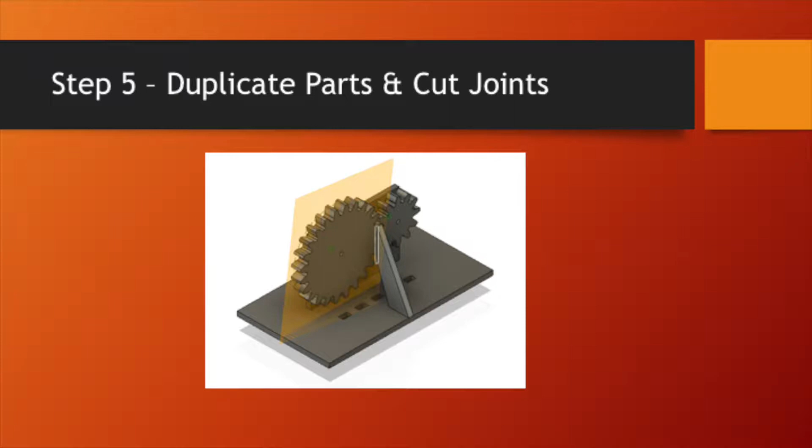We now need to make sure that we have two uprights and matching braces on the other side. And then once we've got all our parts in place, we need to cut the joint holes, because if I just cut this laser part out now, by turning the braces off, you'll see that the braces don't actually fit in. So there needs to be little holes cut in here for the braces.

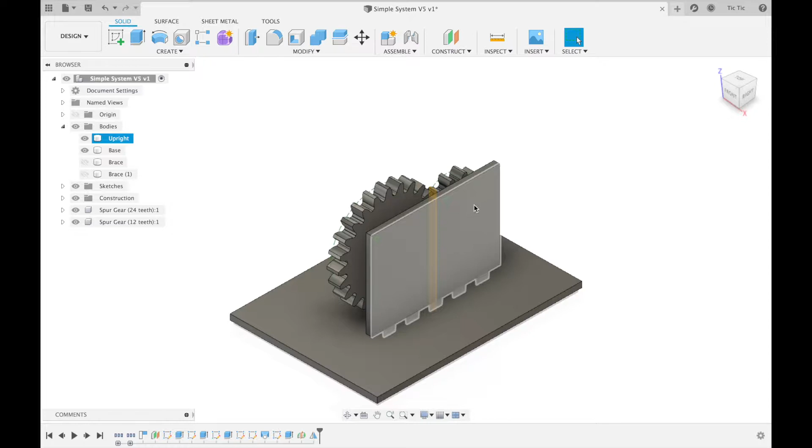And also if you turn the upright off, you'll notice that there's only one hole for the upright finger joints to go in. So we need to cut those finger joints out. But first of all, let's get all our pieces in position. We saw how to do this when I did my extra brace in the middle. But if we go into our construction tool here, we've still got that mid-plane there.

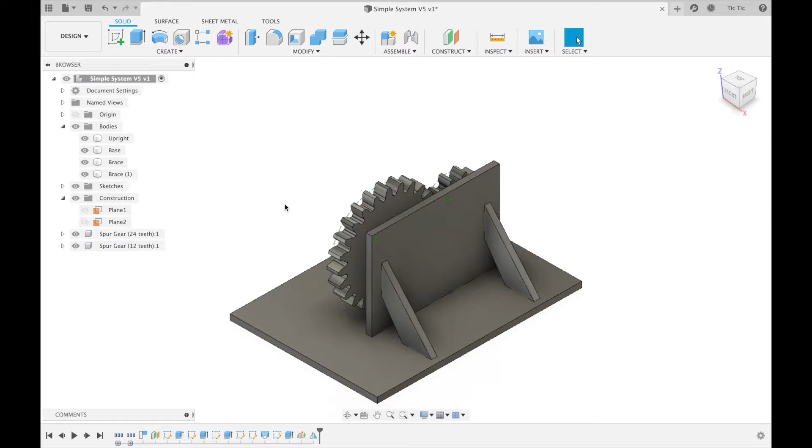Let's turn that off. Okay, so now I'm going to create my construction here, and I'm going to create another mid-plane on either side of my main big gear. So I now have a mid-plane in my gear.

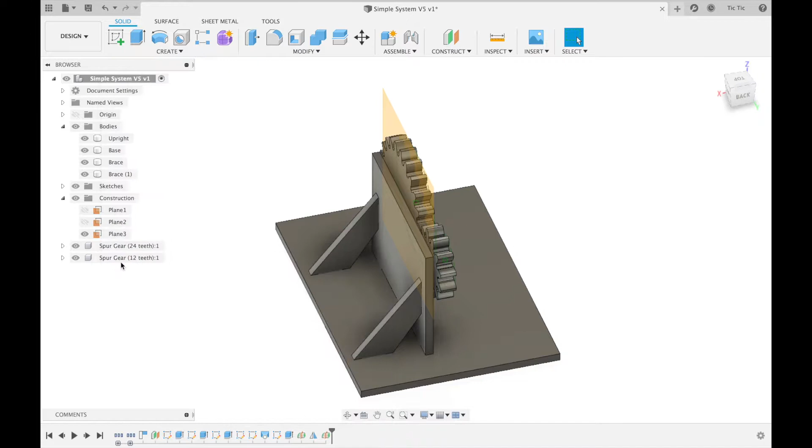I'm now going to use the Create Mirror tool to mirror 1, 2, 3 in my case bodies around my mirror plane. Now that I have those bodies in place, I can now basically see what I've got to do to cut out. Let's get rid of that construction plane by turning it off. And you can see now that I've got lots of parts in here, all nicely labeled.

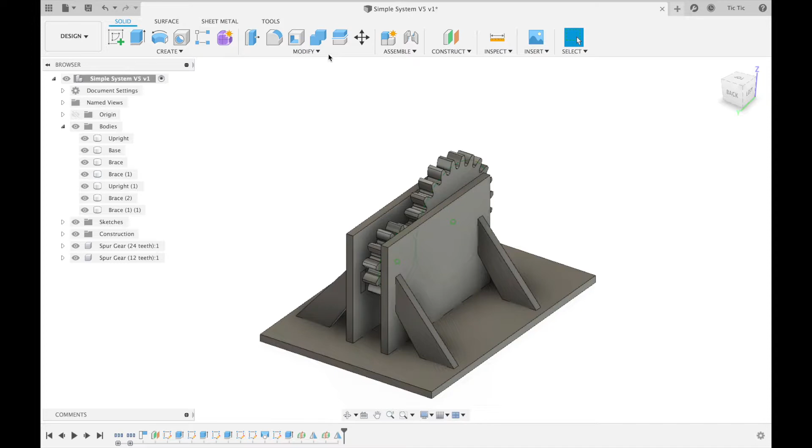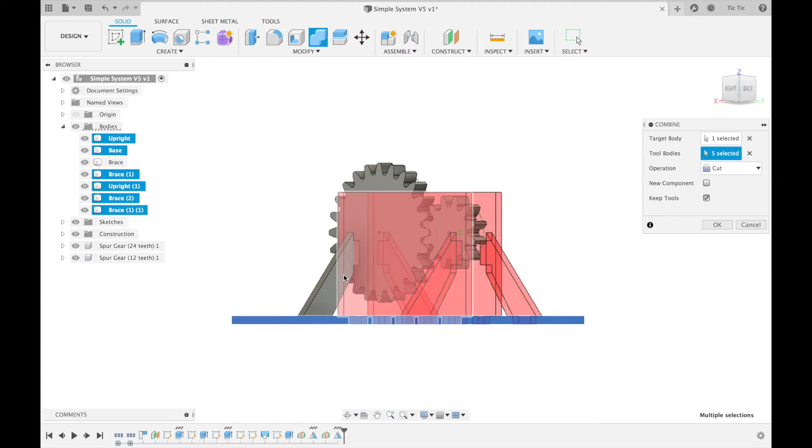I'm going to use the Combine tool, which is up here. And I'm going to use the cut method, but I'm going to keep the tools. The first target body I'm going to select is the base. And if I then select all my tool bodies, which is going to be everything that intersects with it, and going around the other side, that one there, and if I press on OK,

it's going to basically look like I've done nothing. But if I turn everything off other than the base, you can see now that I've got all my holes cut in there. Might be a good idea if I turn those two off as well. So you can see that I've got all my holes cut in there in order to make the joints nice and effective. We also need to cut holes in my uprights.

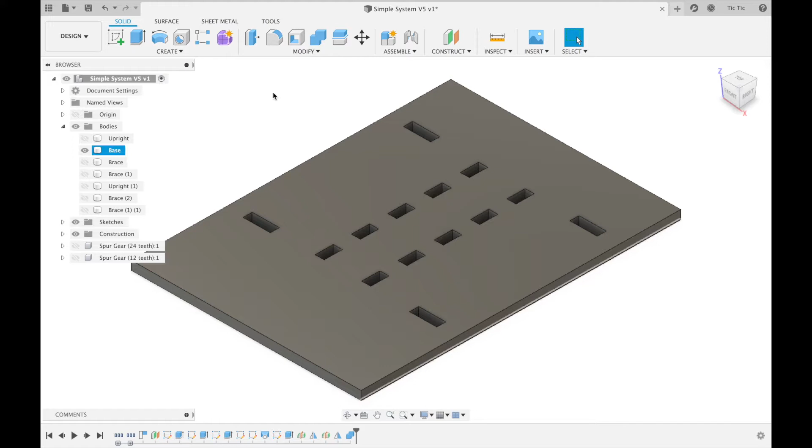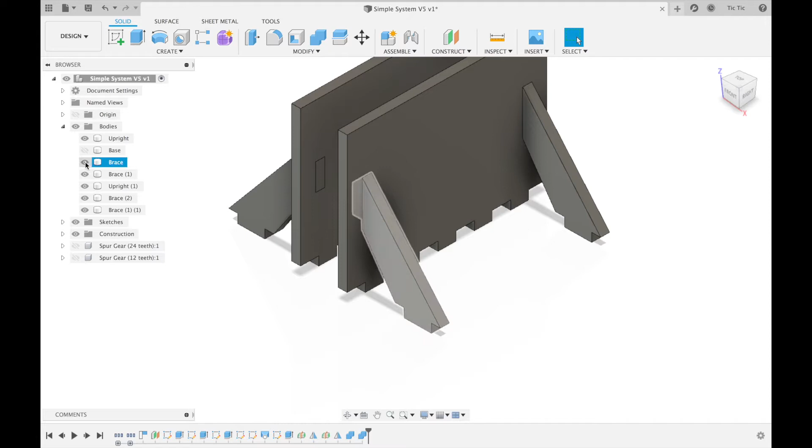So let's turn my uprights on. I'll turn the base off because I don't need that, but I do need all my braces to be able to cut those holes. So I need to do one on each side. So I'm going to do Combine, and I'm going to use this side and use those two as a cut. You now see if I turn that brace off, it's got that hole in there. Let's do the same thing on the other side now.

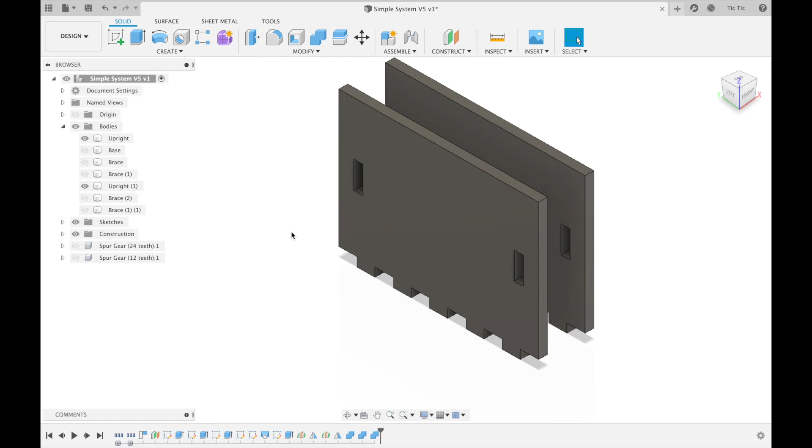Modify, Combine, this one, and press on OK. And you'll now see that if I turn off all my braces, I have holes cut in there for those particular parts as well. So if I laser cut that out now, at the very least, I could create this, which isn't very impressive, but basically I can still create that particular setup.